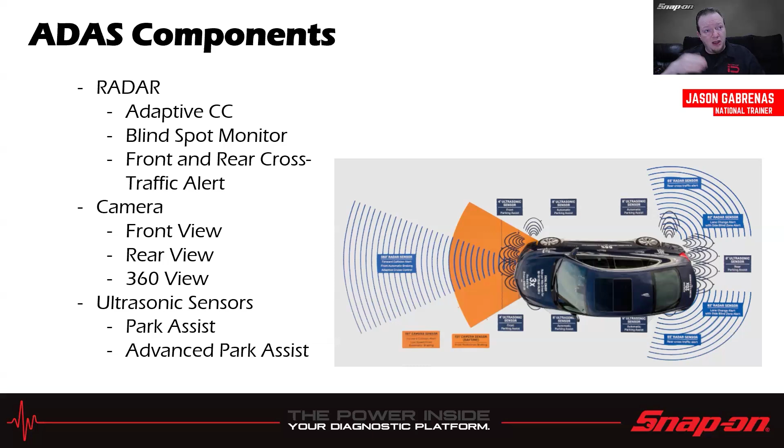General Motors, much like anybody else in the industry, uses radars, cameras, and ultrasonic sensors. They might even use very similar ones to some other brands. I know there's only so many cameras out there and only so many types of radars, but they use radar for their adaptive cruise control, blind spot monitoring, front and rear cross traffic alert, and cameras for front and rear view, 360 view. They also do a bit of distance sensing for their cruise control in some model years, using the front view camera as well, which is a little unique. For ultrasonic sensors, they use that for park assist, and some models also have what they call advanced park assist, where it can help you get into a parallel parking situation.

One other thing unique to General Motors is they use those sensors on the car or trucks with what we call sensor fusion. So they take inputs from multiple sensors on the vehicle, use some processing, and allow the vehicle to have a function called Super Cruise. On certain roads in North America, you're able to use this Super Cruise function, which uses LiDAR map data. So instead of, some manufacturers have been trying to figure out how to put LiDAR on their production vehicles and use that for automated driving and so on, what GM did instead is they sent out a fleet of cars with LiDAR units on the roof, drove around the roads, and mapped them that way. Once they get to a certain chunk of information, they upload it to the server, the server downloads it to the car, and then the car can use Super Cruise in that part of the world. So that's kind of what they're doing.

We'll look a little bit later into it, and it's quite the map that's covered. There are other manufacturers doing a very similar thing, but it just seems like GM is a little further along than maybe some of the other manufacturers. But we'll talk about that a little bit later.

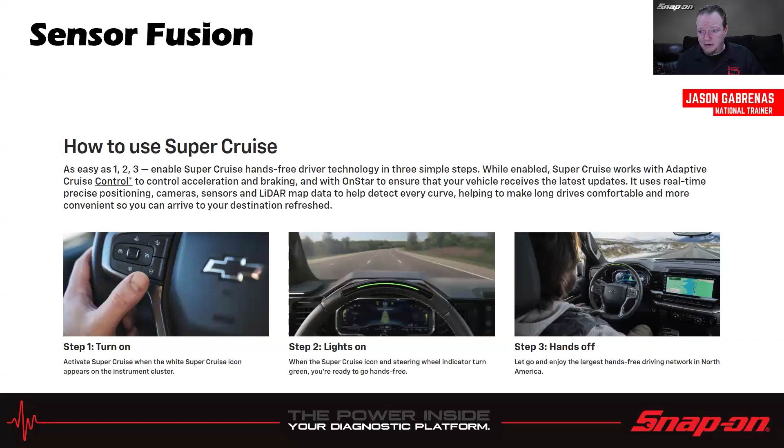So let's talk through our little case studies on our vehicles. The top selling vehicle in North America for General Motors is the Silverado, the Chevy Silverado, the GMC Sierra twins. And the highest selling model year in the last 12 years was 2015, so that is our representative for this. In this vehicle, it has two cameras, one in front, one in back, 8 parking sensors for park assist, and it also, on some models, this was kind of a weird crossover year, so maybe late versions or certain option codes, also used radar for distance sensing cruise.

They use a little bit of it with the camera, and then they also have some with distance sensing cruise that comes up. So the front camera is mounted in the little housing near the mirror. It's got a big shroud up near the mirror, kind of up high on the windshield, like most vehicles have nowadays.

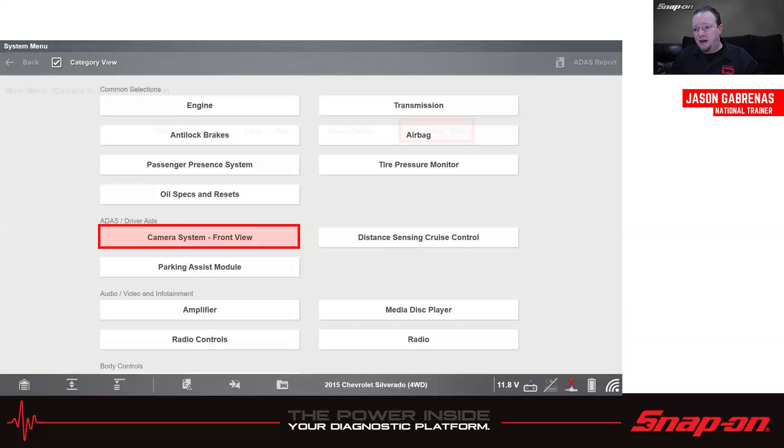If we go into the scan tool, we see the front view camera there, and there's a functional test to do. The front view camera learn is available. One important notice right off the top: starting the front camera learn procedure will delete all the learned values that are in there.

So once it's started, you have to finish it in order for the camera system to operate properly. If you don't go through the entire procedure, it's going to fail, maybe give you a code, and it just won't work the way it's designed. So if we're going to do this, we've got to make sure we're going to do it.

The following conditions are necessary and helpful to reduce the time needed to complete the front camera learn procedure. At this stage, you need to verify if these conditions can be met. They'll be displayed again when you're requested to drive the vehicle later. So if you can't meet these in the location where you're at, you don't want to start this procedure until you can meet these criteria.

Ensure the windshield is clean. You need to maintain a vehicle speed greater than 38 miles an hour, or 60 kilometers an hour, drive on a straight road with visible stationary objects on both sides of the road, during daytime and good weather, and avoid changing lanes. The learn process will take approximately 5 minutes, during which the lane departure warning indicator will be illuminated amber. When the indicator changes to green, the process is complete.

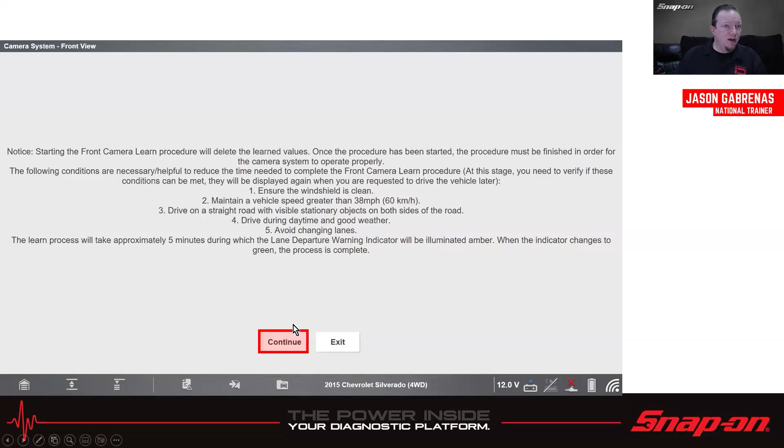So, for example, if it's nighttime or raining, I wouldn't be able to do this right now, so I wouldn't want to hit continue. But let's assume everything is where it should be, so we'll hit continue, and then we would start to drive the vehicle now.

It's going to remind you of the parameters that need to be met. Once it's done, make sure the indicator has changed to green before choosing continue. So it'll be amber, amber, amber, and then the indicator will turn green. When that's done, hit continue, and that'll finish the relearn. Right? So it's simple enough - drive it down the road.

And we will see as we go through this course this evening that, it seems to me GM is the easiest manufacturer to do ADAS calibrations on, because it seems like they're all dynamic calibrations and there's not a single target that I've seen in my research. Granted, there may be one out there for something, but I haven't seen it yet. Some manufacturers for the cameras have 3 targets they have to use and you have to space out. With GM there's no chalk lines, plumb bobs, strings, or chalk or anything like that. It's just, let's drive the vehicle under these parameters and it'll do itself.

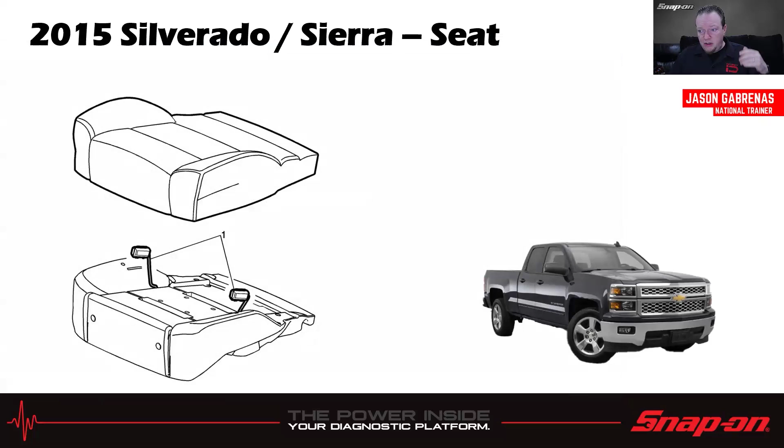Related to the lane departure system, which the camera operates, and I know multiple manufacturers have this - it just so happened they had the little drawing in there in the same article. This was actually the first time I had experienced that in a rental car one time.

So I had a Suburban or Tahoe or something, and we were driving along and kind of drifted over the line a little bit. All of a sudden my seat vibrated on the right side. I'm like, whoa, what's that? Oh, I went over the line a little bit, right? So that was the first time I experienced it, and it was in a GM SUV. That just kind of sticks in my head, I guess. Now pretty much any vehicle that has lane departure warning has it, but back then it was a novelty.

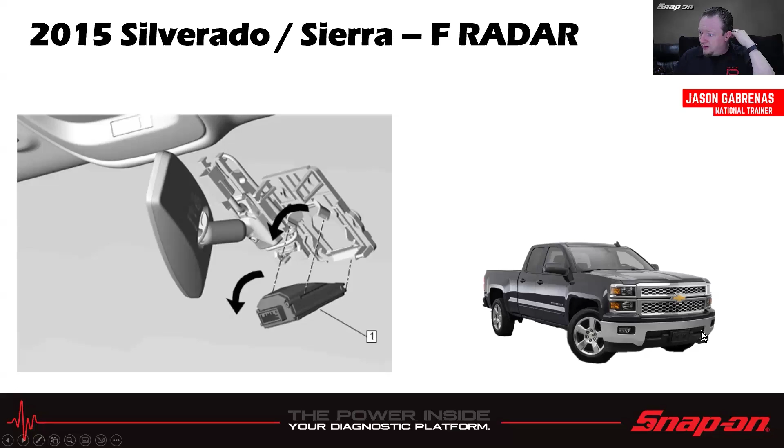Anyway, front radar - couldn't find a drawing for this 2015 model year from GM. Like I said, they do use the camera for the distance sensing cruise control. But if you were to compare it to, say, a Suburban or a Tahoe, it would be right down in this area on the driver's side, on the end of the frame behind the bumper, where it would be.

Distance sensing cruise control is an option in the scan tool, as we can see. And then there's a distance sensing cruise control module learn. This is going to be a very similar process to the camera. So we start the learn procedure, we'll delete the learn values, just like in the camera. Once the procedure has been started, it must be completed.

Driver information display will show a service driver assist message during calibration. The green vehicle icon indicator will flash while on learn. Do not back out of the procedure or press any other buttons until the calibration is complete.

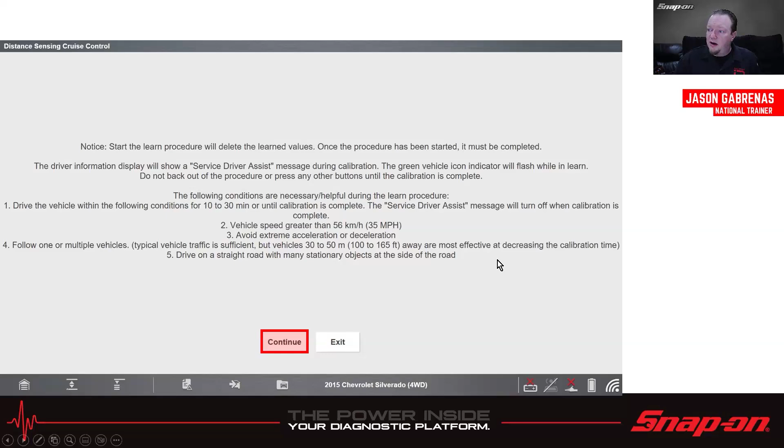Following conditions are necessary and helpful, so it should be 10 to 30 minutes or until calibration is complete. Vehicle speed greater than 56 kilometers or 35 miles per hour. Avoid extreme acceleration or deceleration. Follow one or multiple vehicles. Typical vehicle traffic is fine, but vehicles 30 to 50 meters or 100 to 165 feet away are most effective at decreasing the calibration time. Drive on a straight road with many stationary objects at the side of the road.

Then we hit continue and it would go. Then we wait till the green indicator stops flashing as we're driving. Then we hit continue, and then in this case, they want us to also activate the cruise control by setting a speed. Now, theoretically, safety-wise, once my icon had turned to green, unless I had somebody sitting in the passenger seat doing this for me, I would pull over in a safe area, then hit continue, and then pull back out to drive.

It says activate cruise control by setting a speed. Did the cruise control activate? Yes or no? That's kind of its pass-fail, whether or not it worked. We'll just say yes. And then the procedure was performed successfully. We're done. Easy enough.

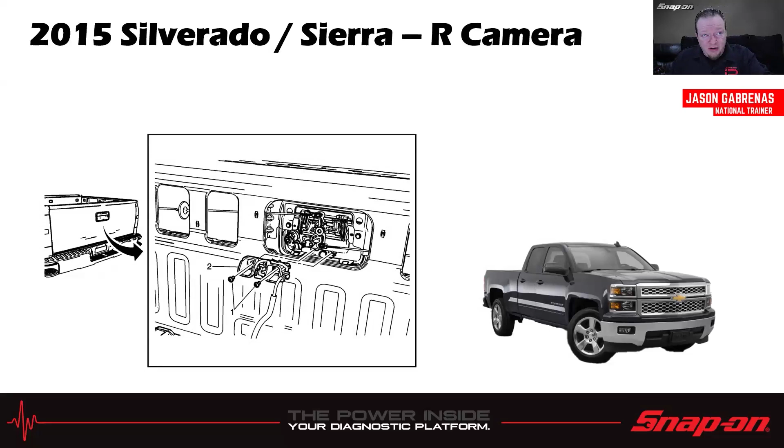Rear camera, no calibration available for that. It's just a camera, and it sticks in the back by the tailgate there, just underneath the tailgate. And then the park assist system, the little sensors just clip into the bumper, pretty much like we've seen in pretty much any other manufacturer. No calibration needed for that. However, we will see on a couple of these other vehicles, there is a calibration that might need to be done. But in this 2015 model in particular, not so much.

Next one, we have the 2019 Chevy Equinox or GMC Terrain. They have two radars in this particular model, one both for blind spot monitoring and rear cross traffic alert in the back. Camera, there's 5: one for in front, this is what they use the adaptive cruise control for; also front view for sign and lane recognition, and then 360 view all around. Ultrasonic sensors, there are 6 in the front and then 6 in the rear.

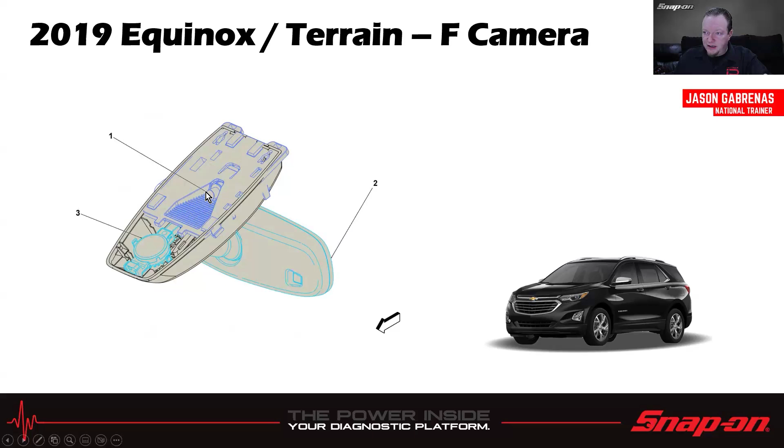Park assist and advanced park assist. If there's advanced park assist, they'll have the 6. If not, they'll have the 4. Front camera, same deal, got it up there on the top, and it's going to be very much the same procedure. But notice how we have a few other options on this menu, but we'll do front view windshield, functional tests, and then there's that front view camera learn we saw on the Silverado already.

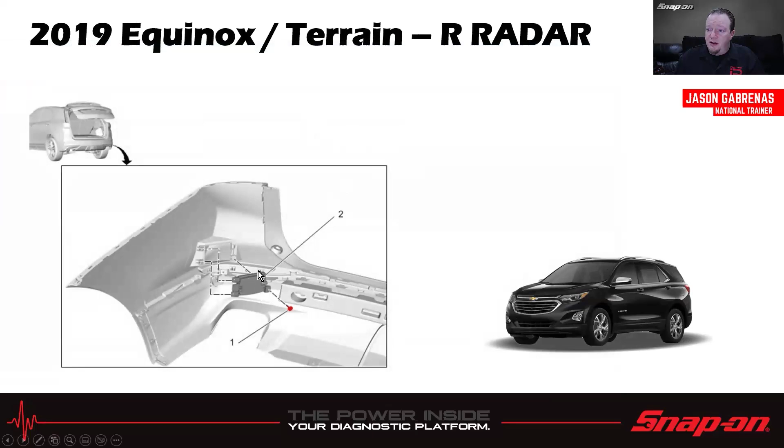Rear radar, like I said, not much going on there. It just kind of bolts to the rear bumper on the inside. And then side object detection module left, we would go into, and go into functional tests. And then you can see there aren't any resets, relearns for it. It just kind of sits there and does its thing. But we can force the indicators, the audible alerts, haptic alerts to trigger, just to test them and make sure they're working.

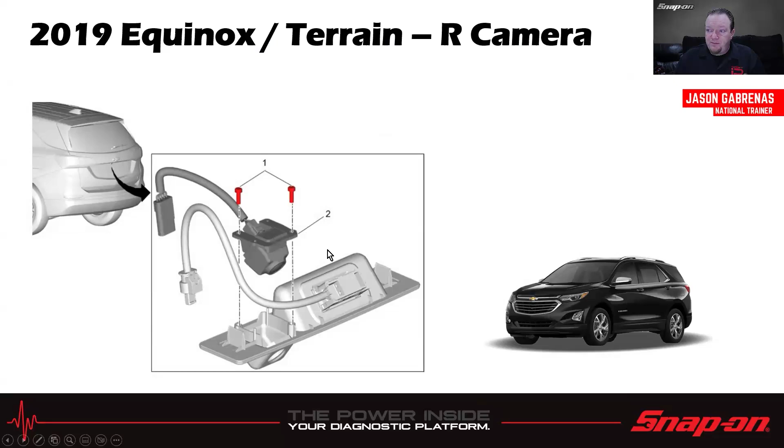Rear camera, same deal, so it's a rear camera, no calibration necessary. And then the 360 camera - this was kind of interesting, I thought, because most manufacturers have some sort of calibration procedure needed for it, and in this case, there isn't. You're basically just going to drive it along the ground and just make sure that the picture comes up. It just kind of hangs out in the mirror there, and that's it.

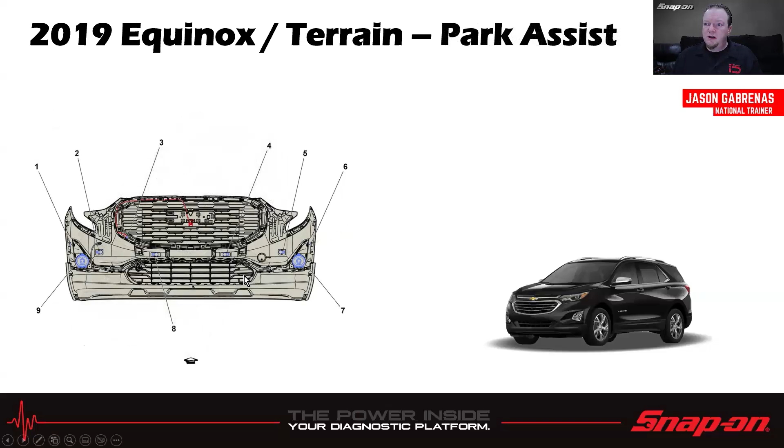And then as far as park assist, like I said, 6 across the front, 6 across the rear. So there's the usual 4 there, and then there's one on either side in front of the wheels. That's for the advanced park assist, if so equipped. And the advanced park assist, that is the parallel park help, as I mentioned before.

When I go into the vehicle on the scan tool, it has me choose the RPO code, which is the option code. Is it advanced parking assist with semi-automatic steering? Or is it park assist with rear sensors only, or parking assist with front and rear sensors? I'm just going to choose that one.

Then, of course, there's functional tests, which would be the beepers and buzzers. But under module setup, there's actually a parking assist sensor alert. This is the first time we've seen it so far in this series where the parking sensors had a relearn necessary. So ignition on, engine off.

Make sure no objects are within 50 centimeters or 20 inches of the parking assist sensors. It's going to count down a minute, do some sort of something, maybe trigger the sensors I guess. Make sure nothing bounces back.

Turn off the ignition and remove the key. Open and close the driver door. Avoid operating any accessories, wait approximately 2 minutes for the vehicle to complete shutdown. So it wants to shut everything down, and it's going to give you a 2-minute countdown once you're outside of the vehicle. Once that's done, it says procedure is complete. So that's what it is—couple minute wait, and we're done.

Last vehicle we have is a 2016 Malibu.

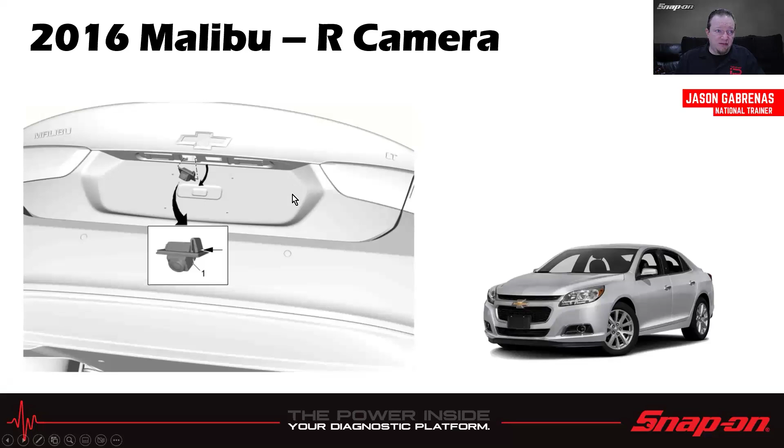So just follow it. Rear camera mounts in the trunk deck near the handle. No calibration needed. Front radar.

It's going to mount behind the grill here, kind of behind the emblem, and just kind of shoot out from there. That's going to be the same situation as we saw on the Silverado as well—it deletes the learned values, you've got to drive between 30 and 50 meters away, good weather conditions, that sort of thing. Same procedure.

Rear radar, nothing really going on with that. Once again, we can trigger the alert indicators and such. And then for the park assist, they're in the bumpers, of course.

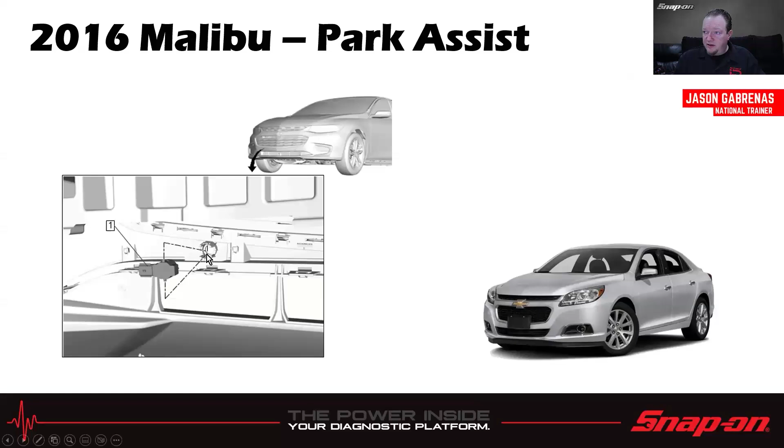In this one, inside the parking assist module, we have a CAN bus configuration learned. So there was a relearn for the actual sensor on the Equinox, and now we see on this Malibu, there's actually a CAN bus configuration relearn, not a relearn of the sensor. So it's slightly different model to model.

But I think you've noticed throughout these—and we're going to take a little bit of a dive into a newer model here in a minute when we go live—pretty much since they started this, no targets, just drive the car down the road. You do need a scan tool with the proper software in it. But if you have a Snap-on scan tool, it's already included with the software, doesn't cost you any extra, it's just there. So plug it in and follow the procedures.

I think if this is going to be my first foray into ADAS reprogramming and recalibrating, I wouldn't mind doing a GM at all because it's pretty straightforward. You pretty much just put it in learn mode and drive it. As long as you drive it within those parameters, it should only take a few minutes and it should calibrate itself. It's a pretty smart system.

So let's look live real quick. We'll talk about a couple different things.

So here we are in our scanner. I'm not going to pull up the scanner quite yet. I'm going to look up Super Cruise first. All right, so we do have Super Cruise up here, the website from GM.

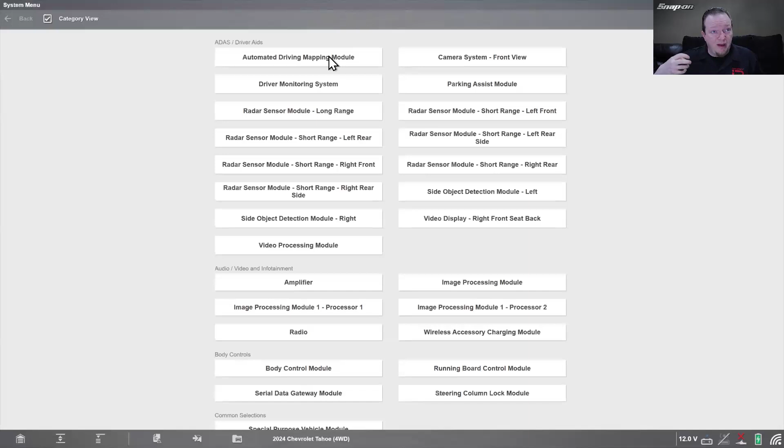So there's an automated driving mapping module, so that's where it would actually download that map data, that LiDAR map data, to the vehicle. Front view camera system in the functional test, we have a front view camera learn, and look at that. It looks pretty much exactly like the one we saw on all the other vehicles. They haven't changed it since they started putting it on the vehicles, which is wonderful.

Maybe there might be a speed thing. No, still 37, oh, 37 miles an hour. The other one said 35, right? So it's close, but you just want to make sure. I'm not going to go through that though, but you can walk through the procedure and just drive the vehicle.

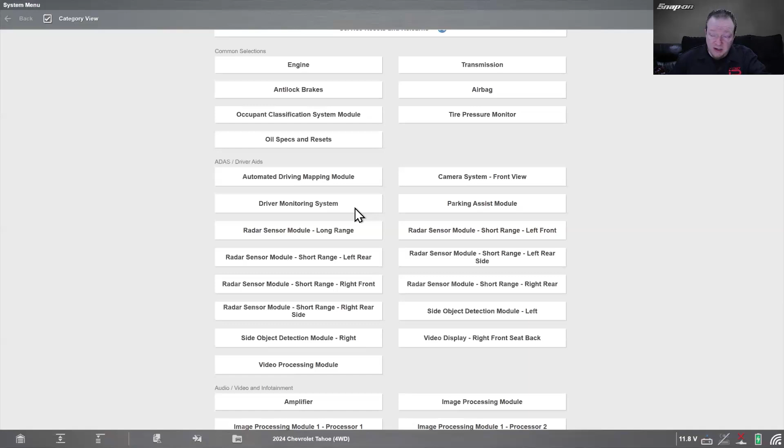Also, yeah, with the Super Cruise system, you can take your hands off the wheel, but don't just open a paper or magazine or start playing on your phone or anything like that, because it has a camera that monitors you and makes sure you're paying attention. And if you're not paying attention, it disengages the system, so it kind of defeats the purpose.

Radar sensor modules, as we can see, the long range in the front, and then we have short range: left front, left rear side, right front, right rear side. So it's got a bunch of radars on it. 6, 2, 4, 6, 7 radars on it. That's where it does a lot of the work, I think, and then the camera system as well.

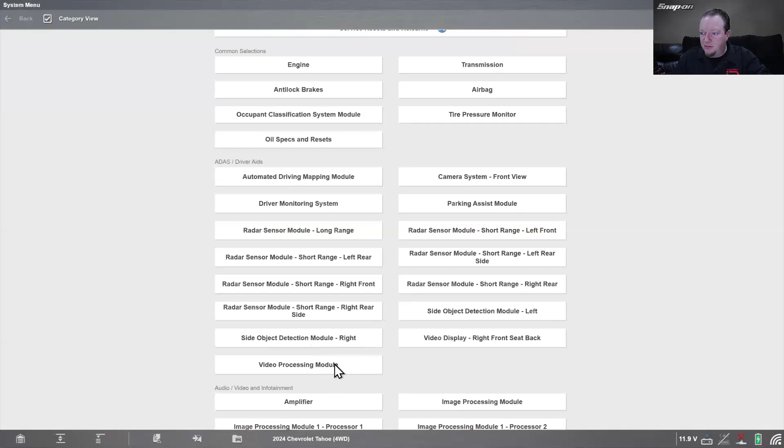Park assist, side object, I already went through that. Video displays, video processing modules. So all sorts of different things in here.

But there is also another thing that I looked up here: the vehicle dynamic sensor offset calibration. So the vehicle dynamic sensor would be kind of like your yaw sensor, your roll pitch sensor, that sort of thing. It's kind of like a gyroscope. It doesn't require calibration often, but you do need to calibrate it when you replace it, or if you get a certain code. And the calibration procedure can be completed with a scan tool, but you have to go where you might not necessarily suspect you need to go.

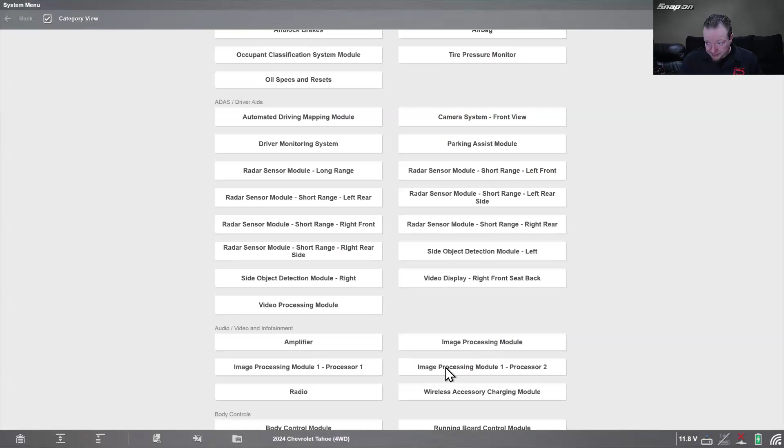So it says select image processing module processor 2. I wouldn't know necessarily where to find that unless, of course, I read through service information, but let's go in there and find it. So it's actually under here, under audio video, image processing module processor 2. And we go in there and into functional tests, and there's that vehicle dynamic sensor offset calibration.

Place the vehicle on a flat, level surface, remove all excess weight, ignition on, engine off. It's going to go through and do it. It's basically like a zero setting, a reset. It just resets it to where it needs to be.

It is not always where you might think, because on some vehicles the yaw sensor or pitch sensor might be located in the airbag module, and in other modules on other vehicles. So knowing where to find these things is very helpful.

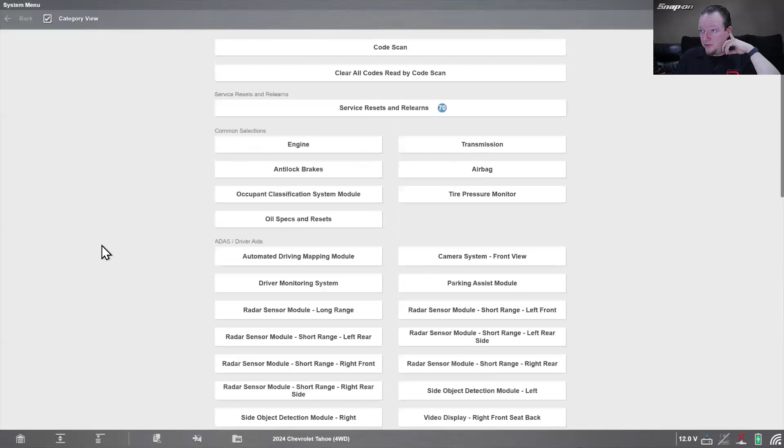And with that, that's our short and sweet GM course. Not a lot of complexity with these vehicles. There's no targets. Basically, hook up the scan tool with your software, plug in where you need to go, run the functional test, drive the vehicle like it tells you to, and a couple minutes later it's done.

So not terribly complicated. All right, let's talk about what we're going to talk about next week.

Next week is a subject near and dear to my heart: scanner versus scope diagnostics. I get to talk about scopes again. It's been a little while on this channel, but we're going to talk about scanner versus scope, and why you might want to use one over the other, or use them in combination depending on what you're doing. They each have distinct advantages and possible disadvantages. So we're going to talk all about it.